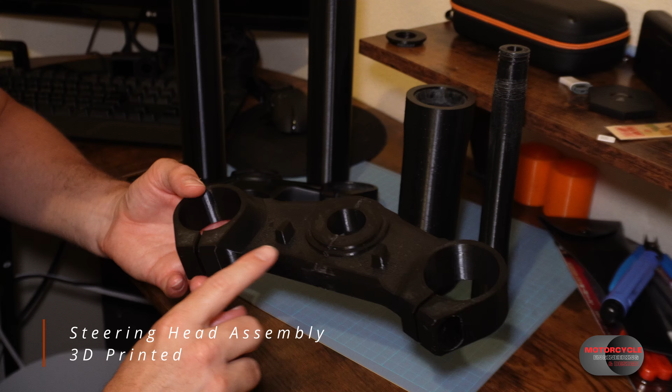So I've actually been working on a headstock assembly here for other purposes, but I think it's a good opportunity to talk about this now. So let's take a look. Okay, so this is my steering head mock-up. So we have the lower yoke here. And we see I have some design features here. I'd like to show you how you can model those. I've seen this kind of design on some more premium aftermarket parts. So take a look at that in CAD later on, or you can click this button here and skip straight to that part.

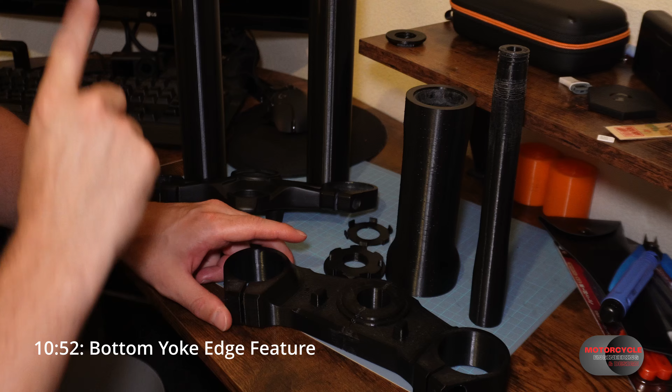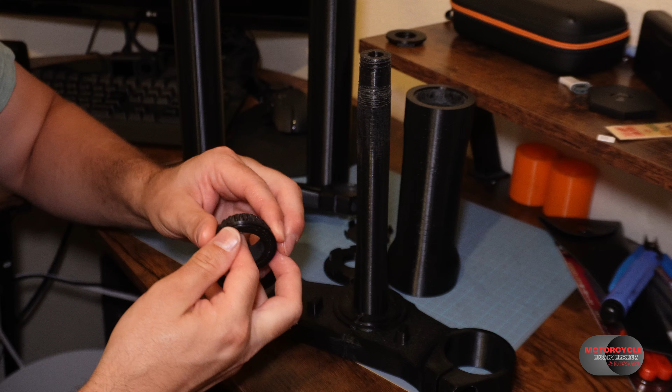Then we have the stem, so stem in. And from there we then have the lower bearing seal. I haven't printed the seals, but we do have some bearings that I printed off. I've gone with the tapered roller bearings, so slide that down. Then we have the headstock tube. So I haven't finished putting all the different features on here, but I have pressed in the races, and I have made the mistake of sizing the internal diameter based on the internal diameter of the bearing itself, the lower bearing, and not the race. So I can no longer remove the top or bottom races, so be careful of that if you're planning on doing something similar.

So we drop our headstock tube down, and we have some free movement. On top of here now, I'm just going to drop the representation of the stanchions. On top here we have the top bearings. Now these actually turned out really nicely. You can hear that rattle where they're all moving around, sliding on these very nice bearings printed off here. So slide that down. This is our top bearing, and then we'd have some combination of lock nuts which come together. Now, to get these threads to work, I actually had to increase the scale of one of my parts, and I accidentally increased the vertical scale as well, so it doesn't all fit together as I wanted. So we're going to skip the assembly of multiple parts and the lock ring that would prevent the two parts from rotating away from each other.

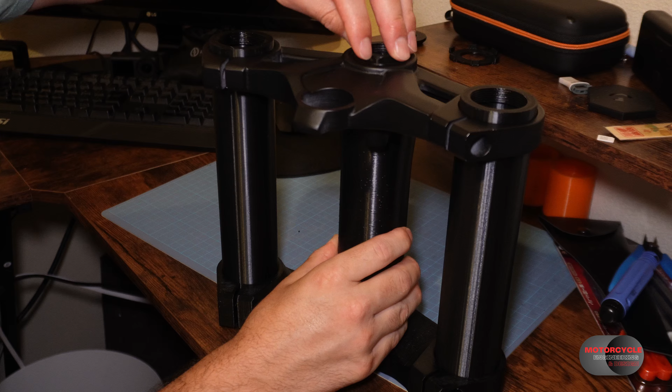Then we have the top yoke. See if I put that on here. And then the top nut. So this is my steering assembly currently. So this is now going to be a fixed rake angle if I was to weld this into a frame.

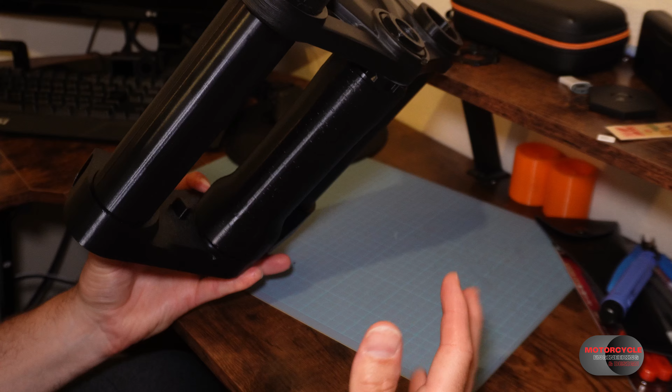So let's assume we fully build this motorcycle, this frame up, and then we take it for a test ride and it's super twitchy and it really wants to just drop into every corner. Ideally, we'd want to increase the rake angle so that we can increase the trail, and the easiest way to do that without affecting other things would be to adjust the head angle. Otherwise, you'd be looking at increasing the diameter of the wheels or adjusting the length of the fork stanchions, dropping the whole front end essentially lower onto the forks, but you may not have clearances to do so.

So by allowing us to adjust this angle just in the tube, you can achieve increased trail values, which can help increase stability. So let's take a look at what that might look like in CAD.

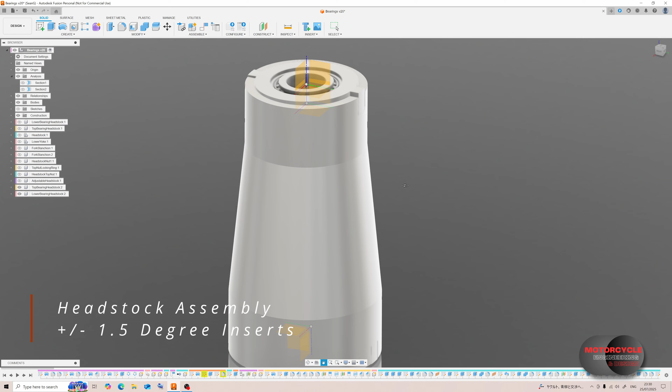Okay, so this is a mock-up assembly of the headstock with variable rake angle inserts. This is a very rough one because I haven't fine-tuned the thicknesses of the inserts to the wall of the headstock, so it's very oversized. This could definitely be tuned down.

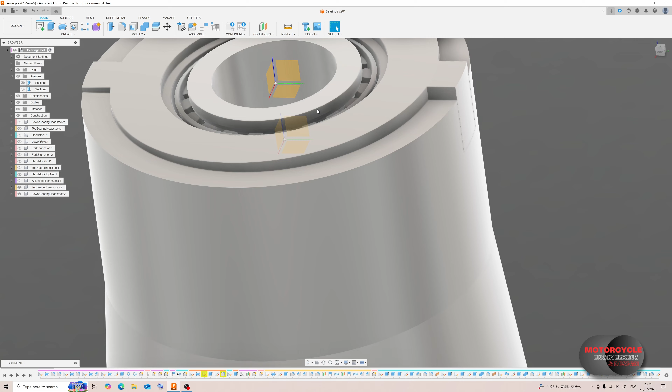Essentially what we have here, this is the top of the headstock. We have bearings positioned in here, and the axis, or at least where the bearing seats on the axis, is going to be the same point whether it's angled in this direction or in this direction. Now if you add on the section view, you'll see what I mean. So essentially we add an angle for the seat for the bearing, and then we've also angled the side surfaces here with the insert.

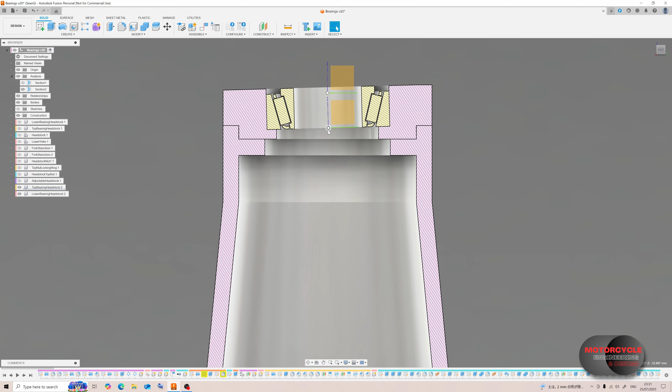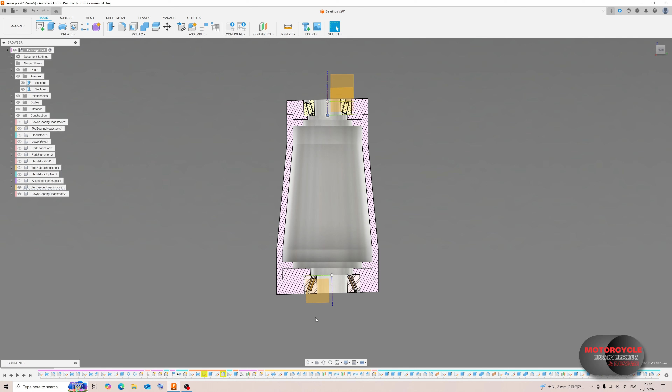By retaining the position here, we minimize the amount of variation we have to introduce in the top of the tube. That means that the variation in degree that we introduce, so if we increase or decrease the rake angle by 1.5 degrees in either direction, for example, that's going to be substantially different at the other end because of the length of the headstock. So it's 180 millimeters in this case. So if you can see, looking at the center line, we've gone fairly far off of it.

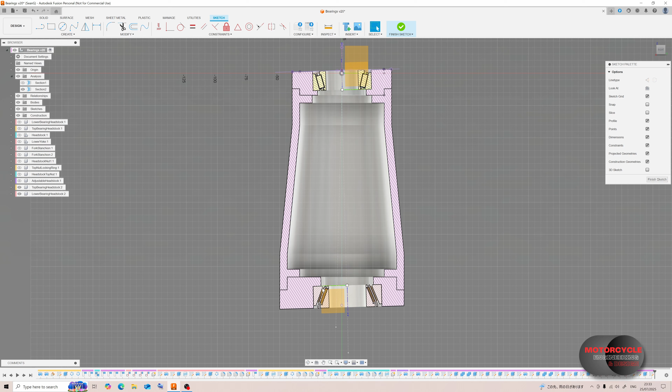As I said, there is some fine tuning here, so it's not going to be quite as substantial as this. But the reason we introduced the large variation into the bottom of the tube is because that's going to be in a more discreet location. The top of the tube is right in front of the rider's nose, so we don't want to affect this too much visually. This part is going to be more discreetly hidden behind the forks, and you shouldn't really see it, and it shouldn't really be too noticeable.

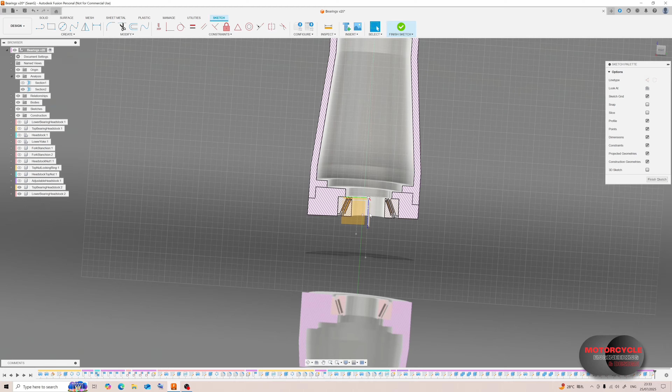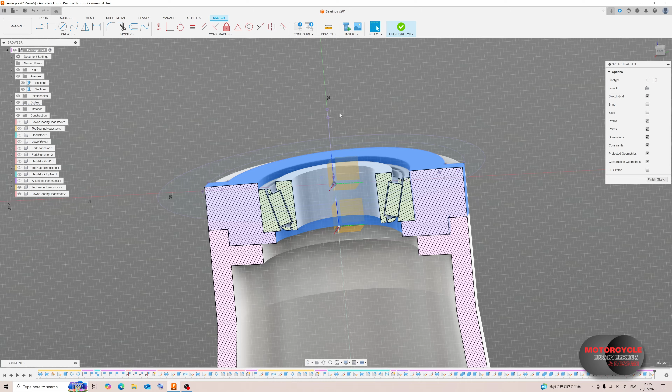So what I've done here with the insert is I've added this boss feature, which I've also cut out of the headstock, and that's going to help locate and orient these inserts. They can also be swapped 180 degrees, so that's how we get our plus or minus 1.5 degrees from this particular set of inserts. Of course, we can have any number of variations as long as it's going to fit within this headstock tube. So whilst I've gone with this compact insert method, there are other methods or other kinds of cups that are used in custom bike building.

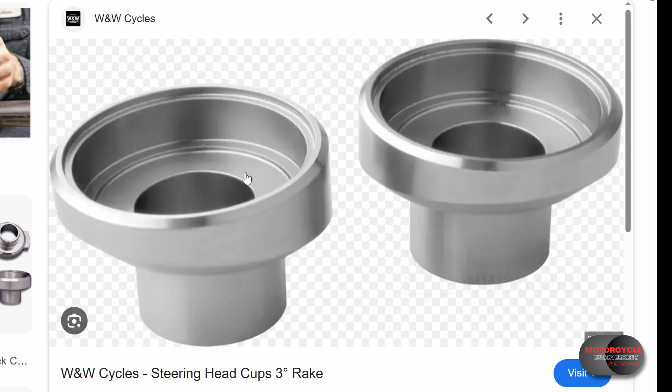So we'll take a quick look at what we can see online. Just a quick search for motorcycle headstock cups, and you'll find things like this. It's essentially eccentric cups which are going to be slotted into the headstock, and you can see that the surfaces that the bearing is going to be pressed onto are at an angle, very similar to the idea of the inserts. It's all the same principle of introducing that angle for the head bearings to sit into.

So if you could build two, where your first one is the prototype, your first one could have some adjustability built into it, and once you find the ideal condition, your second version would be your more fixed condition. So I really wanted to highlight that it's probably quite a critical point to try and include or introduce some adjustability into your custom builds.

With them being custom builds, you don't really know how they're going to be handling once you finish building it, and you want to have some adjustability so that you can try and control and improve the conditions if they're not so stable, because unlike production, you're not running a mule bike, a test prototype, as you develop the motorcycle. You have this one bike that you're developing, you're building up, and then it's on the road, and there's not much you can do in terms of adjusting the frame at that point.

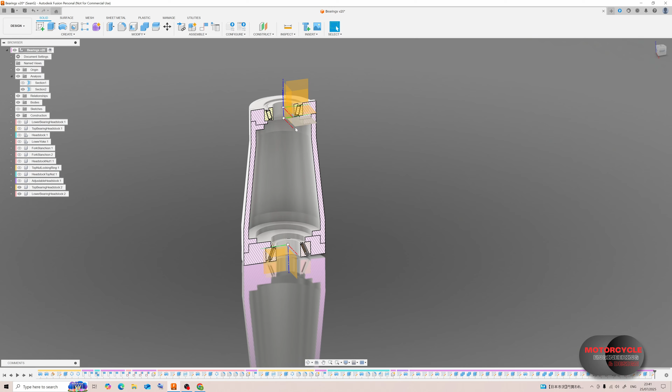So look for things like this that can help include some adjustability in your frames. And for things like your ergonomics, your rear sets, handlebars, that's a little bit easier, but also consider things like that as well.

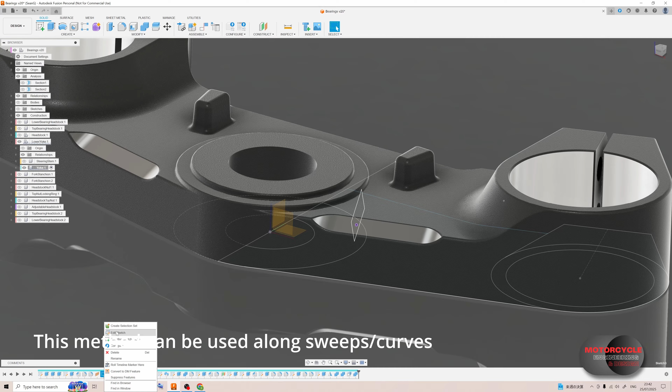I mentioned I wanted to show some design features in the headstock, so I haven't made this as beautiful as it could have been, but I just wanted to show how we can make things like this. You see, if we use a plane on an axis or an edge, we can then draw a sketch on that to help trim or cut away a chunk of material. But once we've cut away that chunk of material, we're then limited to chamfers and radiuses.

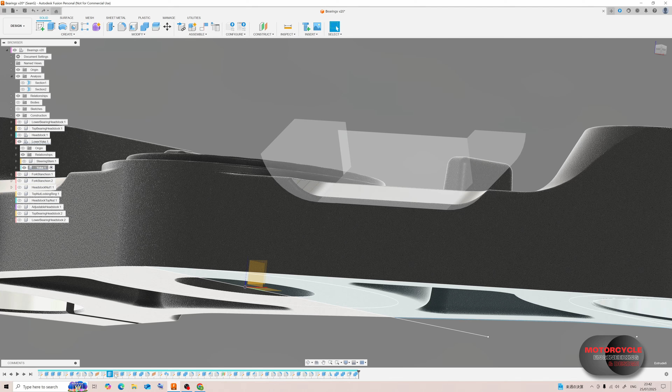So what we can do, instead of cutting away that material, we can extrude a block, keep it as a separate body, and then on the body we can create a sketch like this, and then extrude that and merge it with the block. So then we get some geometry like this. So that's how we can start merging and cutting away material to make some more interesting shapes.